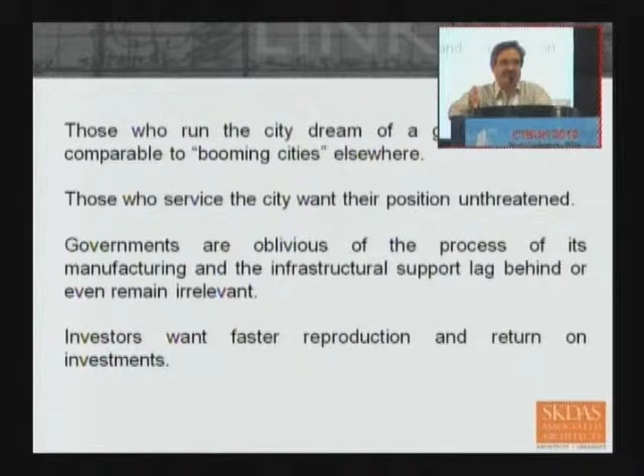Those who run the city dream of a global metropolis comparable to booming cities elsewhere. And those who service the city don't want their position threatened, so there's a set pattern and set way of delivering services, and that has to continue for them.

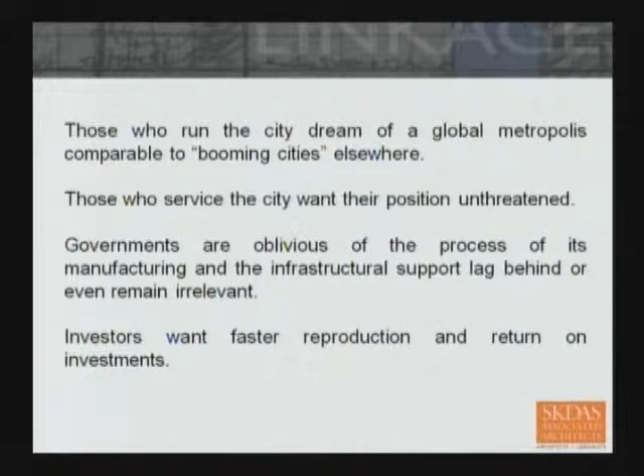The governments are oblivious to the process of the city's manufacturing. They simply underestimate the infrastructure requirements and the services we need to support the population we have and the increasing population in our cities. And investors and real estate developers obviously want faster reproduction of money on their investment.

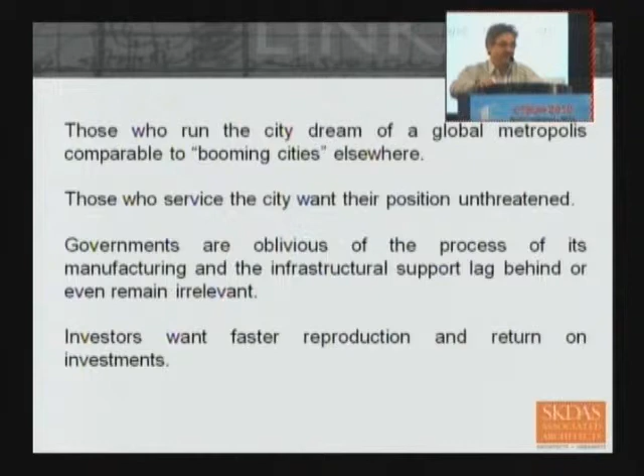So urban management, governance, and spatial ordering interplay with issues concerning community and social formations, and the freedom of choice and the ordering of urban space and services.

Indian cities are granular, multi-layered, and very finely textured. The many layers are like parallel and interdependent cities. There is no one city, there are many cities. They exist, they coexist, they're interdependent, they're overlapping, and each city represents very specific needs and aspirations, sensibilities or combinations thereof. Together they represent cultural diversity.

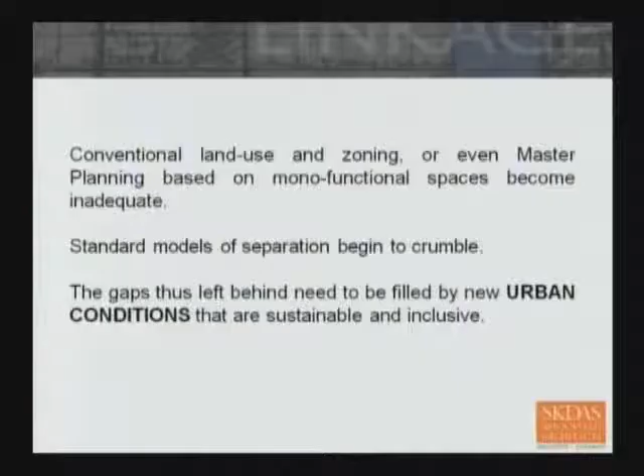In this scenario, I think it is high time we discard the conventional land use zoning and even master planning based on monofunctional spaces. Delhi is a classic example of strict zoning and strict land use controls separating everything, workplace from residences from commercial developments, etc. The standard models of separation have begun to crumble in any case, if you look at what's happening in the market and on the ground. The gap left behind needs to be filled by creating new urban conditions, some of which we just saw examples of. But these conditions have to be sustainable and inclusive in a democratic society.

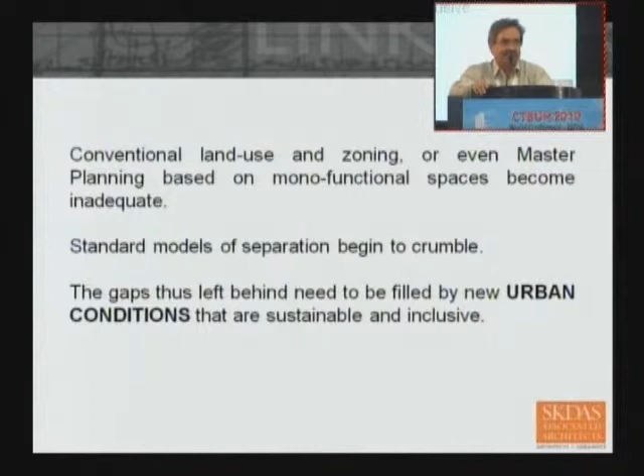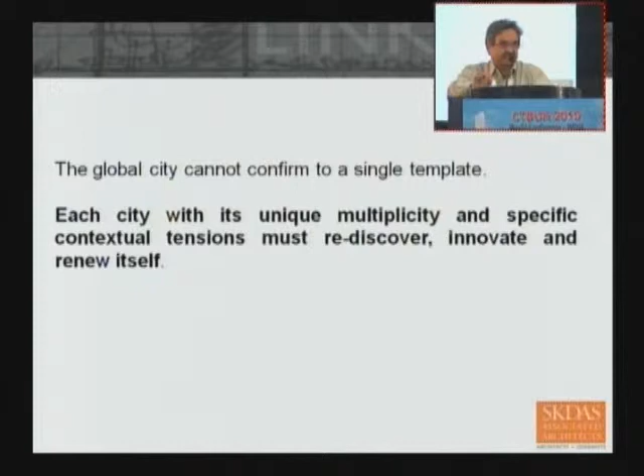A global city cannot conform to a single template. Each city, with its unique multiplicity and specific contextual tensions, must reinvent and rediscover itself, innovate and renew itself. In this respect, architecture ought to engage with community and civil society. It cannot be isolationist. Today's architectural isolation makes no sense at all beyond property boundaries, and that must dissolve.

Rising prices, affluence, and global aspirations imply that India should and will have tall buildings. But these have to happen in a mosaic of low-rise developments. The genesis of tall buildings will come from developers and investors with staying power, and users who have the paying capacity and are looking to satisfy their personal needs.

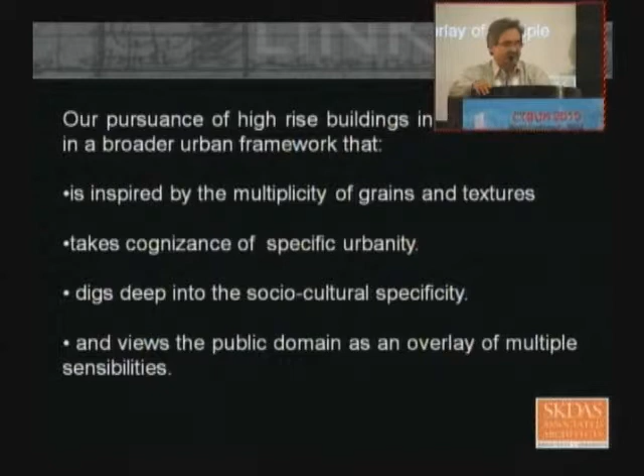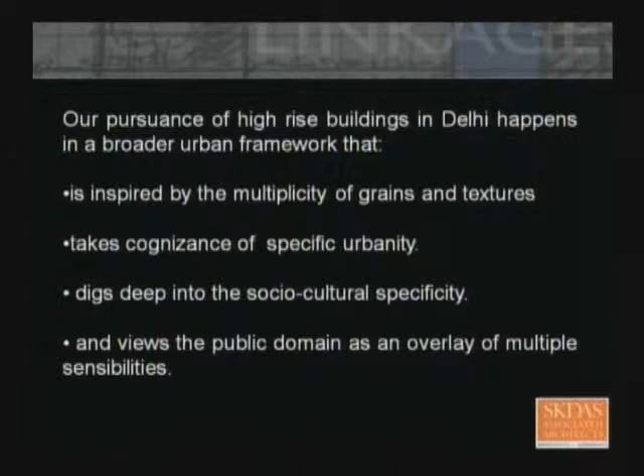I'll give three or four examples of our work. This was a project we did, a new town on the outskirts of Delhi called Crossings, because it's located between Delhi, Ghaziabad, Noida, and Greater Noida. Our pursuit of high-rise buildings in this project, and in Delhi in general, happens within the broader urban framework and not just as an isolationist exercise. It's inspired by the multiplicity of grains and textures, takes into account the specific urbanity of the place, digs deep into sociocultural specificities, and views the public domain as an overlay of multiple sensibilities.

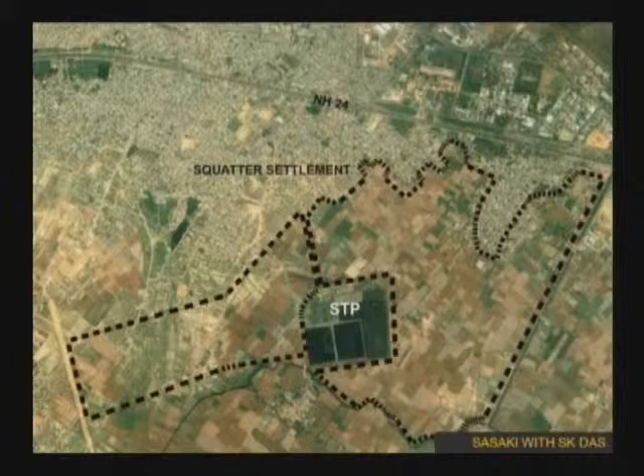This was a site of 600 acres, out of which we did the master plan in detail for 300 acres. We engaged with the city. In the middle is a sewage treatment plant that pre-existed, so we negotiated with the city to utilize the treated effluent and recycle it into the city as water bodies and lakes. We also engaged with the slum community existing to the north of the site along the national highway, so that slowly they could be absorbed into the city, which could become an ever-expanding city. As they are given accommodation in place of their slum houses, done through their associations and not individually, more land becomes available to this group of developers to expand the city and finally have a face on the national highway. So there's a land sharing process at work.

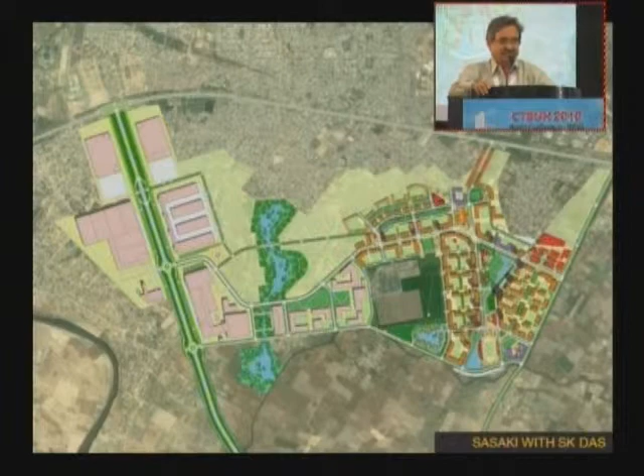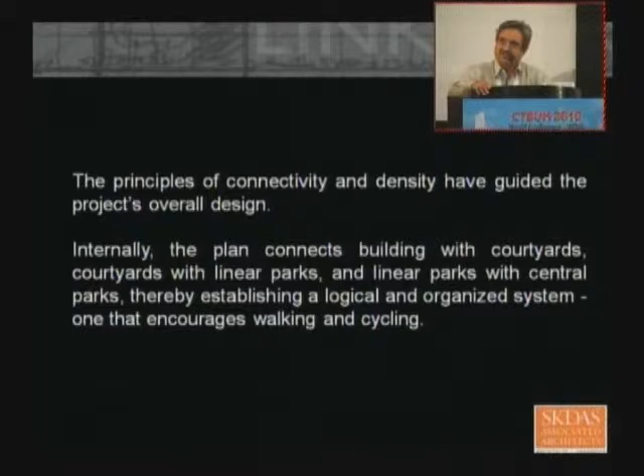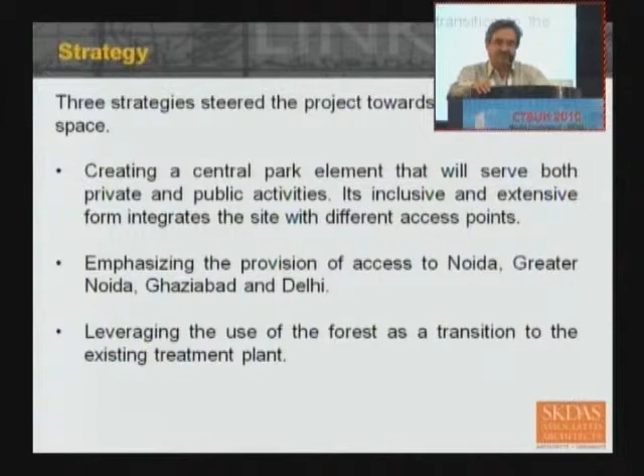The principle of connectivity and density has guided this development: high density, very well connected. Internally, the plan connects buildings with courtyards, and the courtyards with parks and gardens, which in turn connect to the central park. There is tremendous emphasis on cycling and walking. These strategies were used to achieve urban space, creating a central park, emphasizing the provision of accesses, and leveraging the use of the forest and the STP for the community's benefit.

This is a landscape framework. The high-rise buildings I'm going to show coexist with horizontal buildings, and together they produce high densities. The landscape platform we create is a continuous system that runs right across the township, almost like an arterial system or a system of veins. In the middle, you have the water body, which is 2.5 kilometers long, also used for boating, leisure, and recreation.

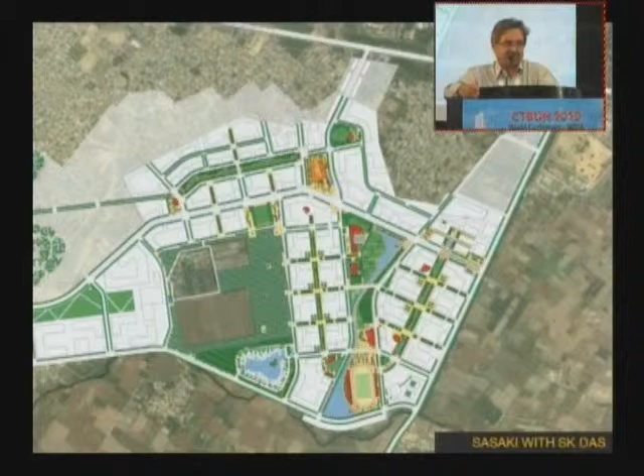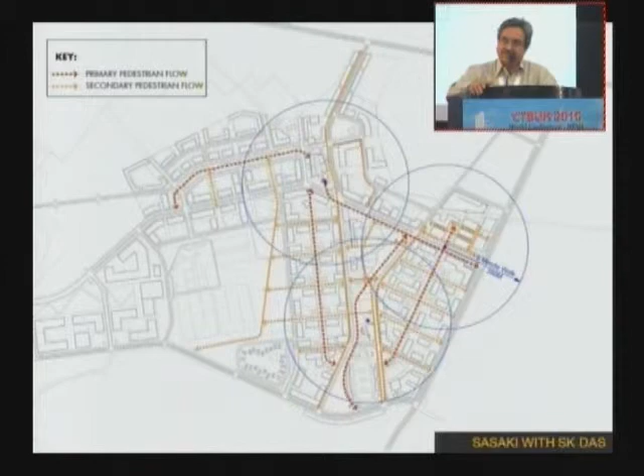So I just talked about the negotiation. One was the negotiation with the city to recycle waste from the sewage treatment plant, and the other was land sharing with existing communities around, who would participate in the project and gradually get absorbed and not excluded. This shows the cycling and walking possibilities within the township, which are unlimited and extensive.

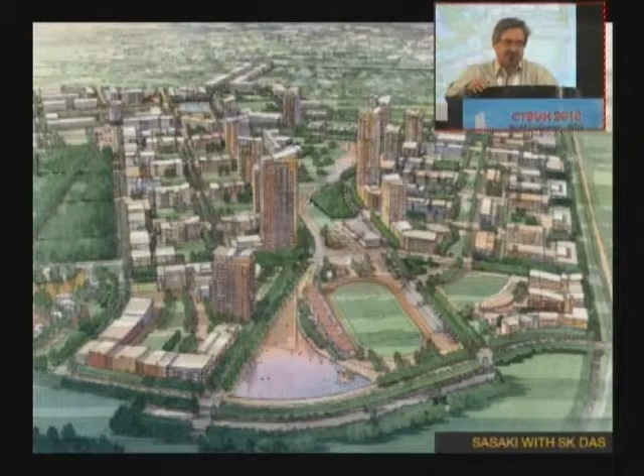And this is what the urban design or image looks like. There are selectively buildings which are 40 floors, strategically located. Each of these large pockets is treated as a superplot. By having a superplot, we are able to manipulate the FAR, have low-rise buildings for middle classes and high-rise luxurious buildings for the upper income group.

And in between, even if the official designated density is up to 3, they balance out, and at the overall site level, it comes down to 1.8 to 2, something which Charles mentioned in the morning. It happens to coincide with that analysis.

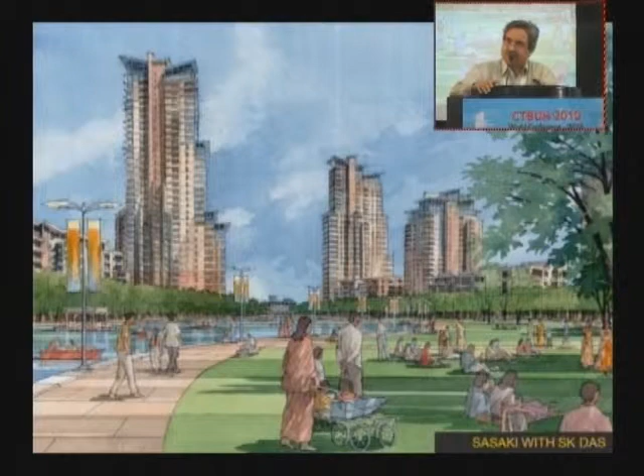Now, these buildings come with a very strong social, cultural, and recreational context. They have access to everything. Unless we give these accesses, these facilities, and these open spaces, and this public domain, these high-rise buildings wouldn't make any sense at all.

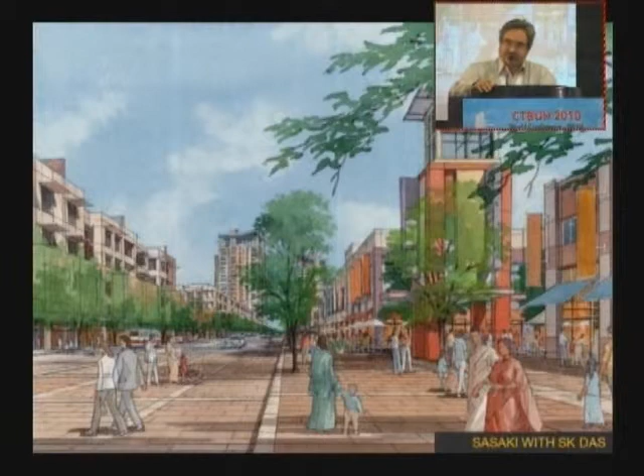Main streets, where the setback of the buildings are aggregated onto the street. There are no compound walls, no gating of the properties, and they all open out, and together we get an extensive, expansive access way with shopping and walking streets, etc.

The second example is something we did 10 years back when the Delhi Metro Rail came into the older part of Delhi. The Metro Rail Corporation and DDA, Delhi Development Authority, got together and engaged us to do a redevelopment proposal for 5 square kilometers of land in the heart of Delhi. But for us, it was not just a redevelopment proposal, it was a proposal for urban renewal, upgrading, reconstruction, landscape development, heritage development, transportation, etc.

So at the end of it, we had a basket of 28 projects that together constituted the so-called broader umbrella of redevelopment.

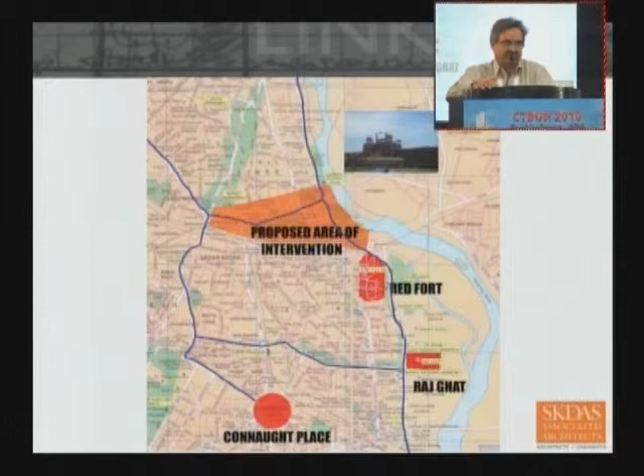The site is very, very central. It is adjacent to the walled city, the medieval walled city of Delhi, shown in green, and the Yamuna River, shown in blue, and 3 metro stations.

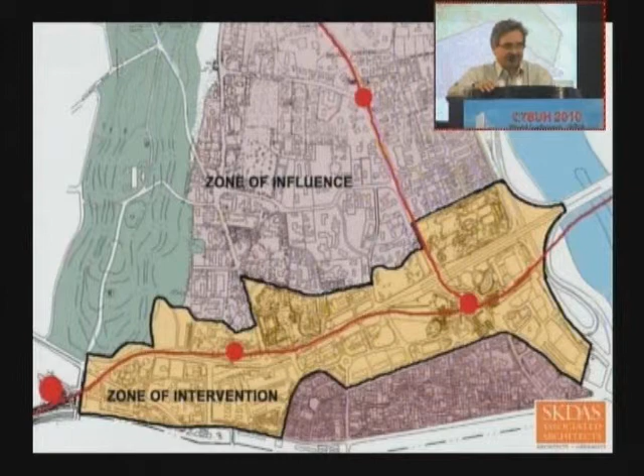And on the top, you have the colonial development of bungalows built during British times with possibly the lowest densities.

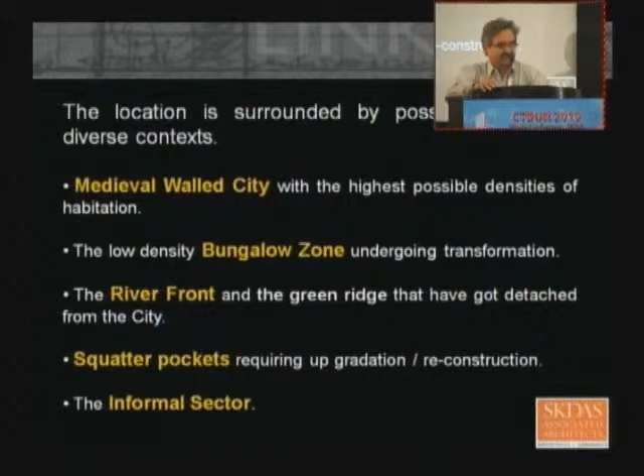And so the context was very diverse. So you have the medieval walled city, you have the bungalow zone, you have the riverfront, you have the squatter pockets, you have the informal sector.

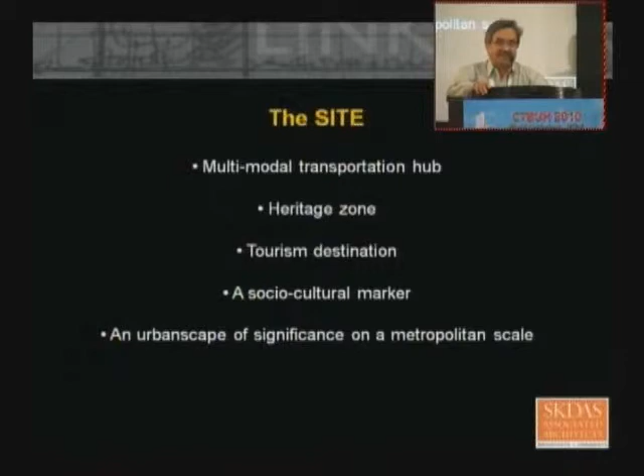Then the site has multimodal transportation possibilities, which is 3 metro stations, an interstate bus terminus, a railway station, and it's a heritage zone. It's a tourism destination with a myriad of monuments and gardens. It's a socio-cultural marker for the entire city of Delhi in terms of food, walking, and just smelling and experiencing the city. And it's also an urbanscape which is very significant on a metropolitan scale.

We have old markets, tiny shops, the monuments, the metro station, and Jama Masjid, etc., surrounding the site. Now, these diverse contexts represent maximal conflict waiting to be resolved.

What we did was we treated this development by treating each part as disparate elements of a jigsaw puzzle and then knitting it together in a seamless flow, with the landscape becoming the binding element.

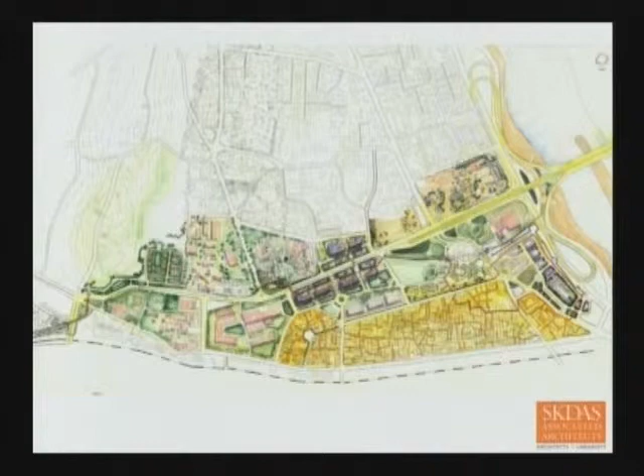Now, from the city wall, there was a regulation that within 200 meters you cannot build anything. So adjacent to the city wall, we developed a heritage park where people can bring out their wares from the walled city and display and sell from there.

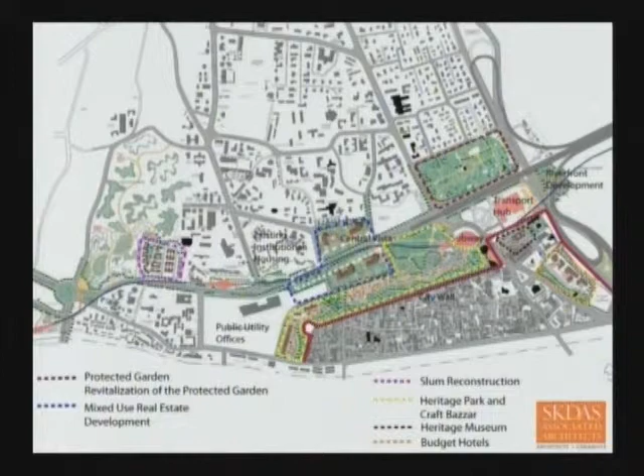It's a heritage park to walk through, and from here you can actually take a walk through Old Delhi. And there are different components of the project, as I said.

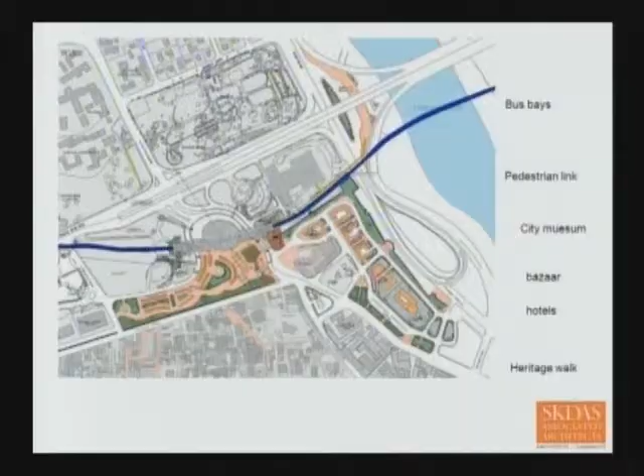And the core of the project was a real estate development. Because when we did this project, we interacted with all the public agencies dealing with infrastructure, from the water supply board, sewerage board, electricity department, to transportation department, and they were all party to this exercise. The exercise was constantly informed by them and endorsed by them.

So this is typically a heritage walk that can take place through Old Delhi, starting from Kashmiri Gate, which is a historic gate, one of the gates to Delhi.

And what we also did, since the metro line connects 3 metro stations, we developed an underground walking possibility, a pedestrian precinct that is partly underground, partly open, periodically opening up and periodically getting covered, which absorbs the informal sector and the bazaars in those spaces.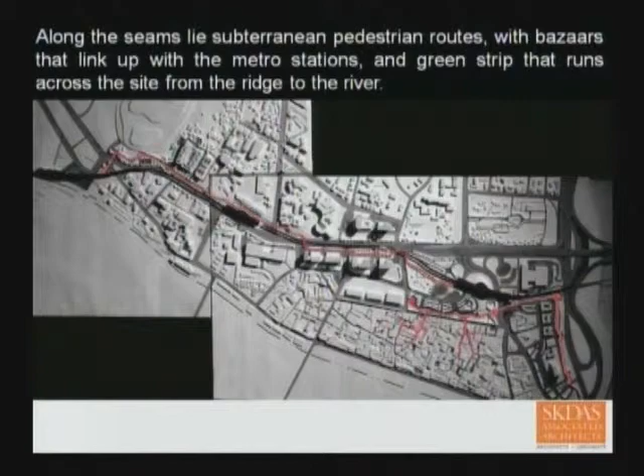And basically the walk, I mean, it appears very simple, it's just a walk, but the idea of a walk is that it combines informal business, provides transportation linkages, links the heritage monuments, the diverse places and locations, and it's also linked with the gardens and parks, and has the hawkers' precincts.

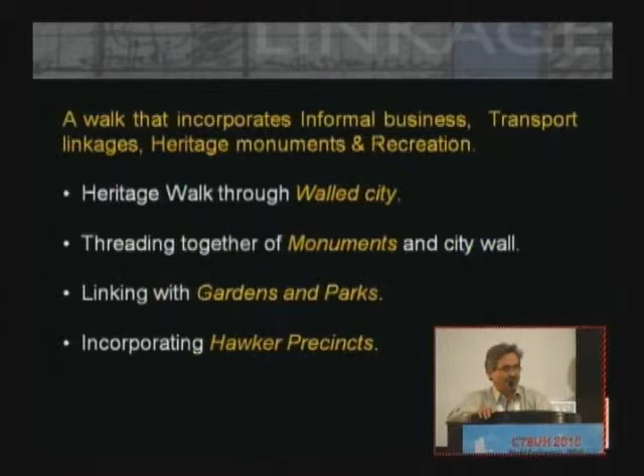In the middle, we had the possibility of real estate development, and this project has been approved by the Delhi government in principle. At some day, this will be put up for bidding process in the market and given to real estate developers. The FAR at the plot level here is currently 2.5, but it can go higher, knowing the circumstances that are now demanding higher floor spaces.

But what we are concerned about is the ordering of the buildings in a manner that the promoters or investors can maximize their profit. They're not restricted by a very strong urban design that limits their possibilities, but at the same time, the projects will continue to have a commitment to the city.

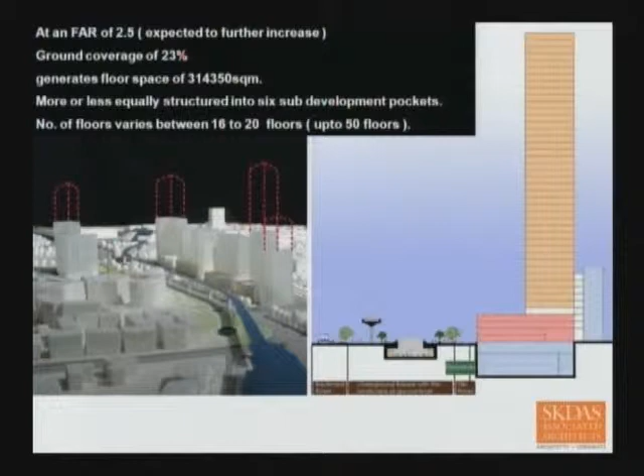So what we had was 3-4 levels of basements. Then the lower 4 floors will be horizontal slabs that will accommodate all the commercial, social, and cultural facilities only, and nothing else. On top, there will be the towers, which are mixed-use towers, having a mixture that the market will dictate. It could have hotels, service suites, residences, offices, and there wouldn't be any restriction on that.

And to this extent, the zoning plan for that zone within the master plan was modified, and this proposal was incorporated as an integral part of Delhi's new master plan.

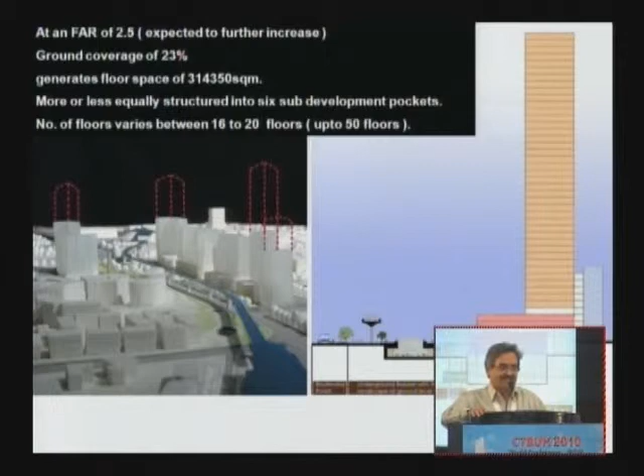So what I want to say here is it is not an exercise in selling an image, it's an exercise in creating a framework and a foundation to encourage new developments. Any number of architects could come in, the developers would bring in their own architects, and they could celebrate architecture, but an architecture that is not exclusive, architecture that integrates with the city, gives something back in return to the city.

So most of the existing settlements on this site, that is the squatter areas, are being relocated, rebuilt on the site, and they are not dislocated. And that is seen as a positive and not a burden.

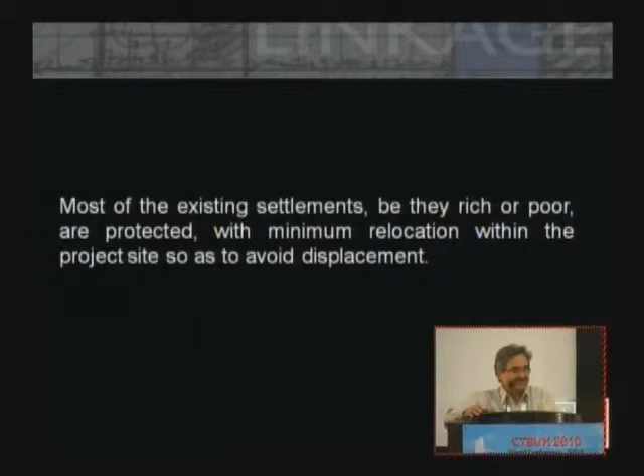Thus, what we have as a result is a collage knit together by a landscape flow, where the formal, the traditional, and the informal are woven together in a symbiotic relationship, without losing their own internal character or their specific interests and sensibilities.

The question I often ask is, I mean, this is very relevant for Mumbai. I think the initiative will largely come out of civil society. And when the initiative comes from civil societies, there is no escape for architects and planners but to engage with the city and with the civil society.

As new social theories emerge in the developing world on the nature of civil society, I propose that we look at multiplicity and specificity as inherent guiding principles of looking at cities and designing within cities. And they challenge the existing notions of planning.

Now, this is a housing we did for senior civil servants in Delhi, rental housing for 100 apartments. This was a site right in the heart of the city. Joint secretaries live here. They're traditionally used to living in villas or in semi-detached houses with sprawling gardens.

Now, if they had to live in the middle of the city, in the heart of the city, they had to live like everybody else, under high densities. So this battle went on. This is the first time the Government of India gave a project of staff housing to private architects. Since independence, this had been done by CPWD, the Central Public Works Department, and the type designs hadn't changed. So we had this 2-year battle. Finally, we won, and the project went ahead and got built and got occupied in 2002.

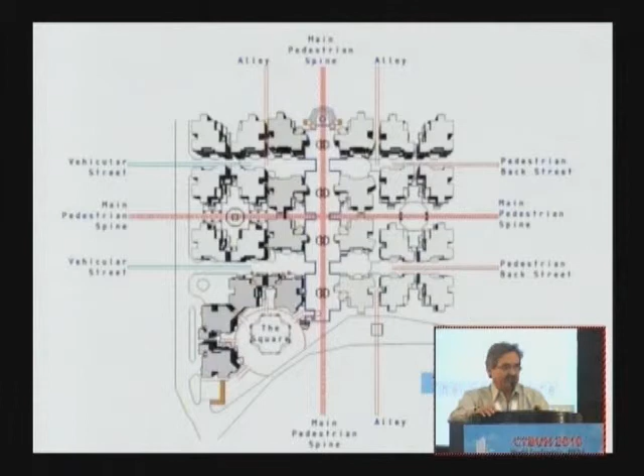What we have is a little over a hectare of site and 100 apartments. It is a planning exercise, it's an urban design exercise, it's a housing exercise, and it's an exercise in providing, encouraging community formation.

So the structure of the place is that we have a north-south pedestrian spine in the middle, then the east-west podium under which cars are parked.

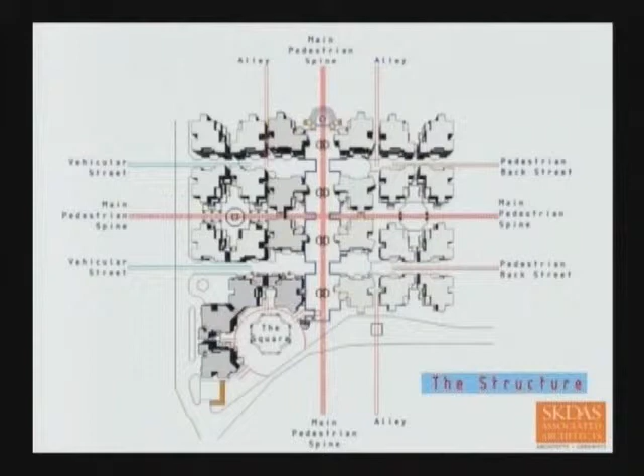Delhi's temperature ranges between 4 degrees to 47 degrees, so it is wrong to say it's just hot, arid climate. It is equally cold desert. So we had to create possibilities of wide streets which are very sunny and open, can be very useful in the winter.

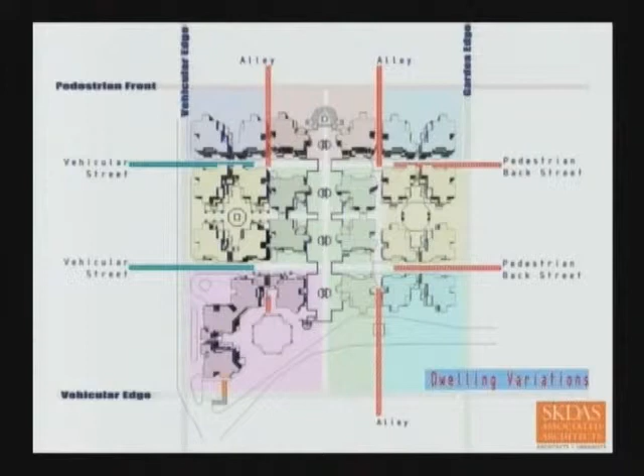And narrow lanes and alleys which are very summer friendly. We have a number of secondary and tertiary pedestrian connections that defined the area as forming a city, and we connected this to the neighborhoods beyond. We did not build boundaries around it, but rather opened it out so people living across could use it.

As a thoroughfare, almost like walking through one part of the city to another. This is how it looks. The footprint covered the entire site, no real setbacks. Like the slide I showed you of Jodhpur city, this is a very high density city.

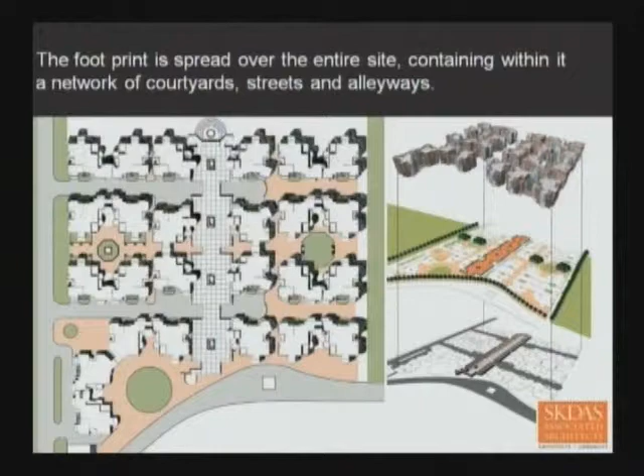Very high ground coverage, 4-story development, one apartment on the ground floor, one on the first floor, and two apartments on the second and third floor, so nobody walks beyond two floors to reach their house. The connections are such that there are internal open spaces that belong to the community, and external spaces shared with housing clusters adjoining.

This is how it looks. So what we have is, as I told you, the podium, which is running east-west actually, but in this drawing it looks north-south. Then the pedestrian street that's running perpendicular, and a third sort of major street, which I call the Old Delhi Street.

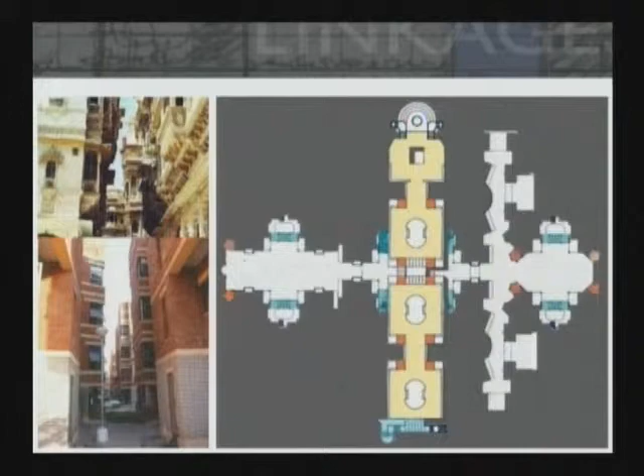It is exacting of a street from the medieval walled city, with all its irregularities and informality, with events taking place along those.

And this is a tenanted neighborhood. But the tenant status notwithstanding, we chose to treat the inhabitants as simply users, as participants in the environment, and not consumers of that environment. Now, most architectural works consign people to being reduced to the level of being consumers, as if they have no rights over it, they can't act upon it, they can't add to it. So that sort of dumbfool perception of common people is something that's highly questionable.

So what we had, this is a photograph taken 4 months after the place was occupied. People started generating their own green, both in public spaces as well as around their houses and between houses. So today when people visit this place, they think it is a real estate project built by a developer, and that it is ownership housing.

It is exactly the opposite of that. It's tenanted housing, people pay rent. It is built by Central Public Works Department, which is not very well known for quality, and it is built on a landscape platform where more than 50% of the contribution on landscape comes from inhabitants.

And there is obviously a case for continuing this cultural tradition and constantly modernizing it, creating this possibility alongside pursuing high-rise buildings.

Now, this is my last project. We are also building 2 of the tallest towers in Delhi at the moment, in Noida. This is called Celeste Towers, residential towers for the towering aspirations of the Indian rich and the globalized citizen.

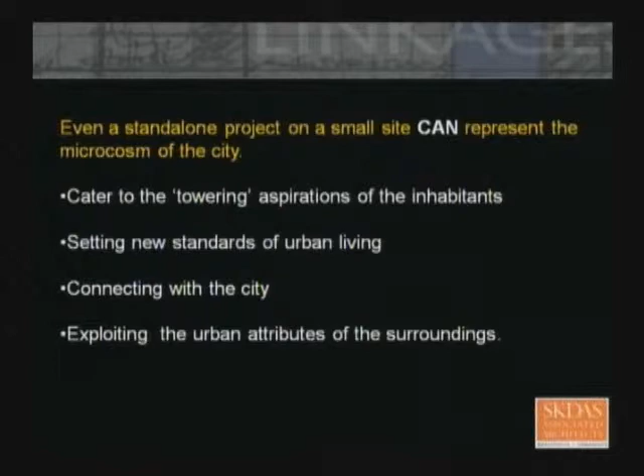Now, the point I want to make is even a standalone project on a small site can represent a microcosm of the city, provided it offers all the facilities and infrastructure, and not in the absence of it. So the ground coverage in this project is 9%. The towers are like two little flies, and 91% of the site is open.

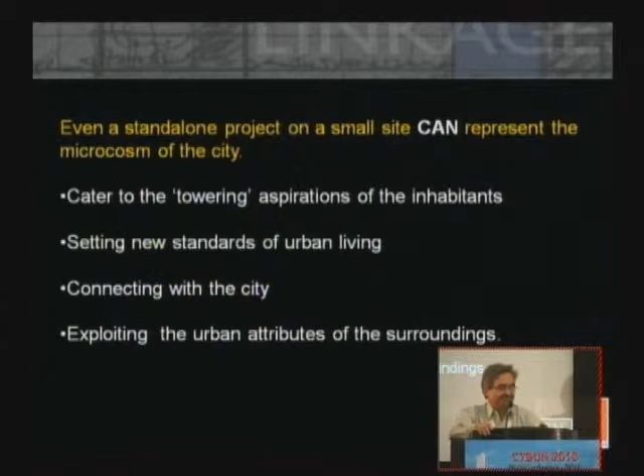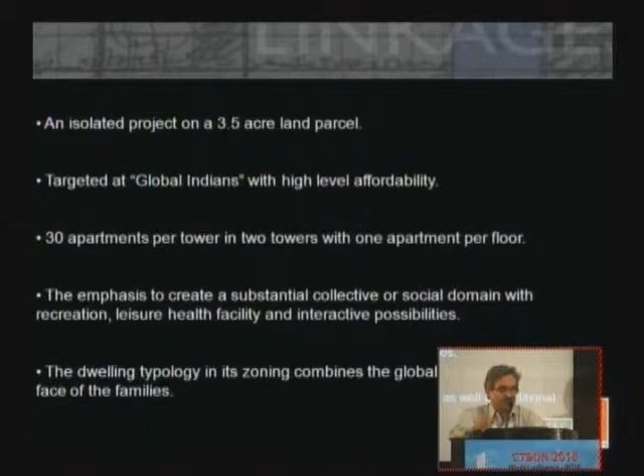On 3.5 acres of land, it's targeted at global Indians with a high level of affordability. It is 30 apartments, one apartment per floor, and two towers. The emphasis is to create a substantial collective or social domain with recreation, health, and other facilities.

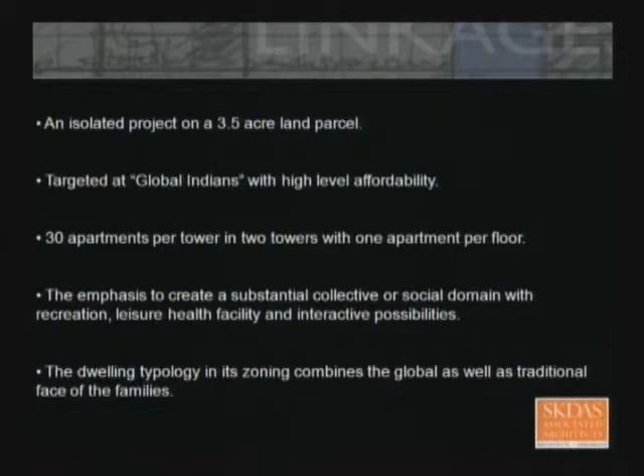The dwelling typology basically combines two aspects of the Indian family, the globalized aspect and the traditional face of the Indian family. So it's a kind of zoning where you have a public zone and a private zone, then a social zone, functional attributes fitting into these zones, and transitional zones in the house. That sort of generates the plan.

The landscape, as I said, the water table here is very high. You get water at the level of 7 meters. So we recycle that water and create a water park, and the whole site is basically a public garden.

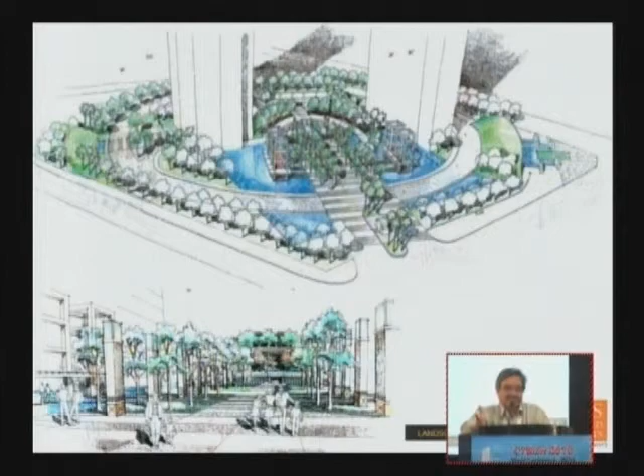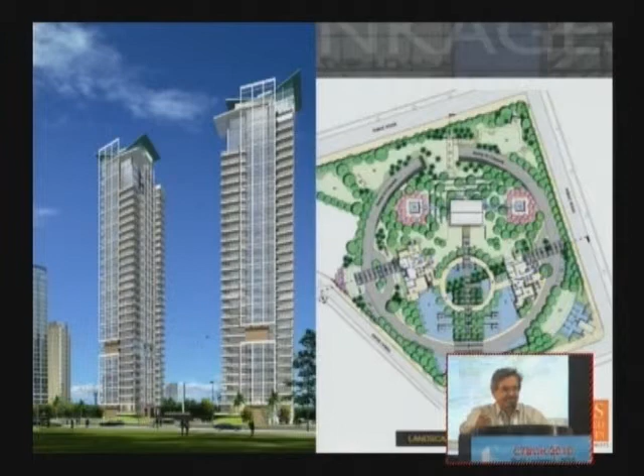And this is the towers. They are modern, they are international in style, but they have strong cultural roots. The ground is converted into either water or a forest, even trees rising over buildings and on top of buildings. Thank you.